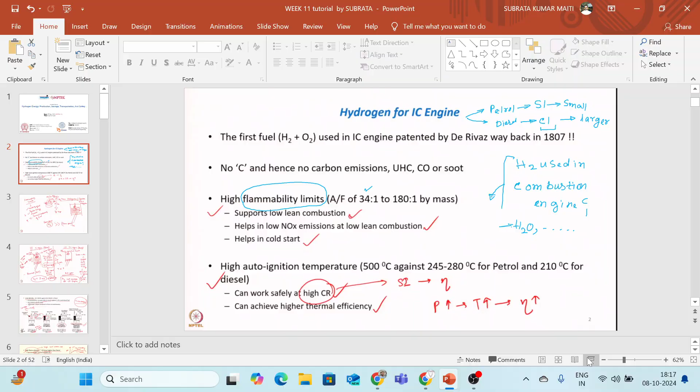And next I am coming to auto ignition. This terminology is very, very important. Auto ignition: why is auto ignition important for IC engines? In each case, auto ignition temperature is important for the petrol engine as well as the diesel engine. If the auto ignition temperature is low, it is better for the compression ignition engine, I mean the diesel engine. And if the auto ignition temperature is high, then it is a better fuel for the petrol engine or SI engine.

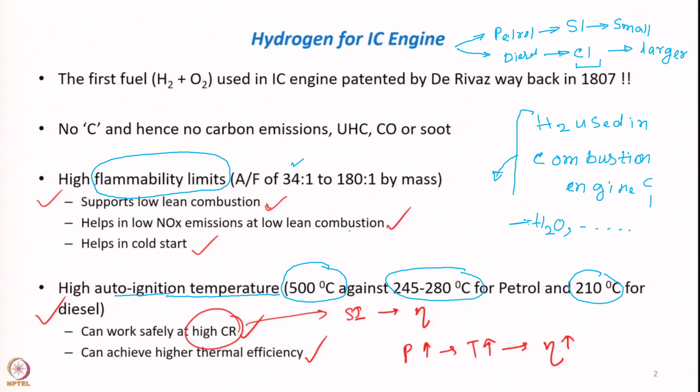So you can remember the auto ignition temperature of hydrogen is 500 degrees centigrade. It is very, very high. Whereas petrol has an auto ignition temperature of 245 to 280 degrees centigrade, and 200 or 210 degrees centigrade for diesel. Why is this auto ignition temperature important? You just need to understand why this auto ignition temperature matters.

Auto ignition temperature. Ignition temperature. As the name suggests, the fuel will automatically ignite. How does it automatically ignite?

Suppose you have one fuel, suppose you have petrol. How will the ignition happen automatically? If we increase the temperature of the petrol, then at a certain temperature, for the case of petrol, 280 degrees centigrade, when the temperature reaches 280 degrees centigrade, the petrol will automatically ignite. You do not need any supply of external fire. This petrol will automatically ignite. At which temperature the petrol automatically ignites, this is called auto ignition temperature.

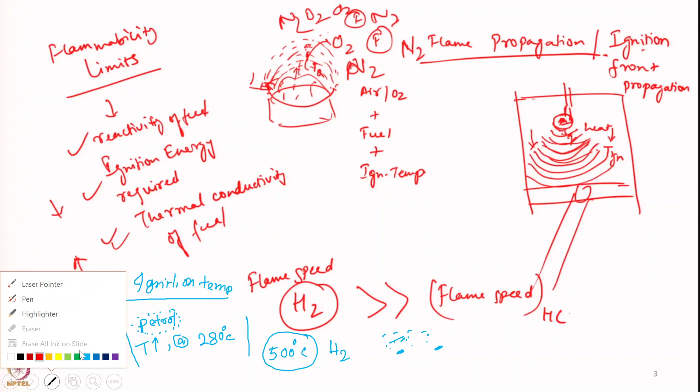Why does hydrogen have a higher autoignition temperature? The density of hydrogen is very, very less. So the gap between two hydrogen molecules is very, very high. When temperature is given, how is it automatically ignited? When the temperature is provided to the hydrogen, the randomness of the hydrogen gas molecules will be high, and the collisions between the two molecules will be less because the distance between the two molecules is very, very high.

What is the inner meaning of autoignition? When two molecules collide with each other in random motion, due to the collisions, friction force will be generated. Due to the friction, high kinetic energy will be generated, and due to the high kinetic energy, energy will be released, and at some level it will automatically ignite. As hydrogen gas molecules have a very large distance, the collisions and friction will be less.

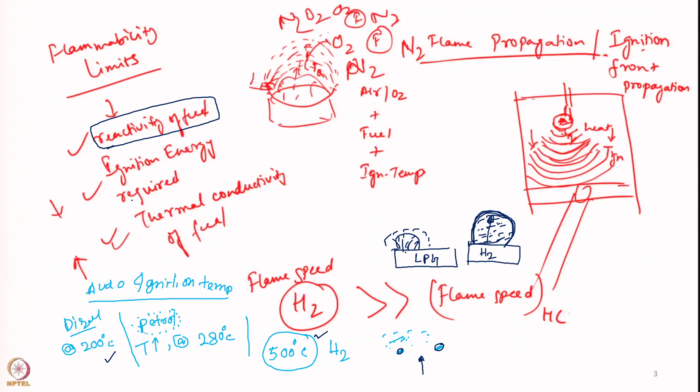Ignition energy is also required, and the thermal conductivity is very high for hydrogen fuel. When the thermal conductivity of hydrogen is very high, at a longer distance, the hydrogen gas molecules will have higher temperature because the conductivity of hydrogen is very high. So the temperature is very high at a certain or larger distance.

So the flammability will be very high for hydrogen.

One more important thing, this terminology is very important, that's why I am discussing it deeply: flame front propagation. That means, suppose this flame front is propagating like a wave. The flame is propagating like a wave. This is called flame front propagation.

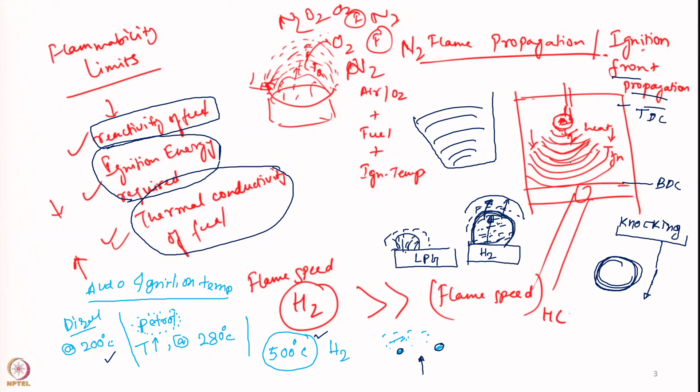These are all the things I discussed, along with the basic principle of the SI engine and CI engine. Again, I am just explaining to you. This is the SI engine, the spark ignition engine, or you can say petrol engine, and this is called the diesel engine, the compression ignition engine. The working principle of the SI engine and CI engine is different.

Coming to the SI engine, what happens in the combustion chamber or cylinder? This is the piston cylinder. This is the cylinder and this is the piston. The piston is moving to top dead center, TDC, and moving downward direction to bottom dead center, BDC. When the piston goes down up to the bottom dead center, the air-fuel mixture, meaning air and petrol mixture, comes into the combustion chamber.

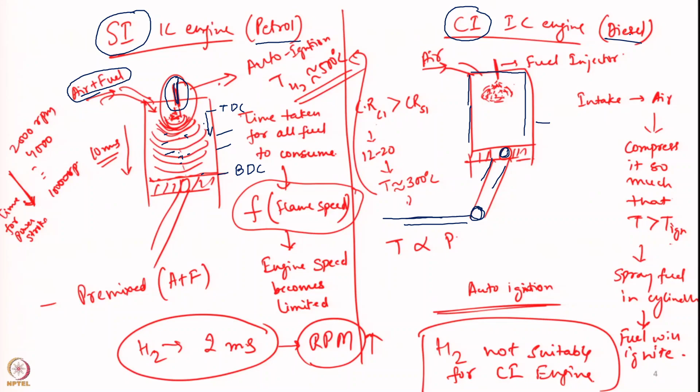For the case of the compression ignition engine, at first air is drawn into the combustion chamber, and the piston compresses this air, meaning the piston goes to top dead center and compresses the air. During compression, if the pressure is high, the temperature goes high.

This temperature will reach up to 300 degrees centigrade. When this temperature is reached, there is one nozzle or fuel injector. This is called the nozzle or fuel injector. What is the function of the fuel injector?

The function of the fuel injector is to atomize the fuel. Atomize the fuel means it will produce the fuel into very small particles, such that the combustion will be uniform combustion.

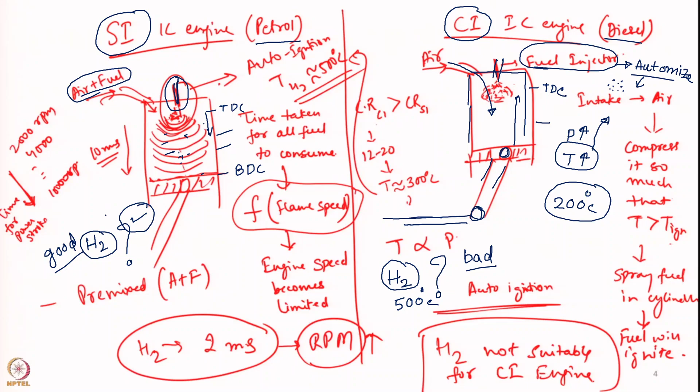This is all about turbocharging - hydrogen can be mixed in turbocharging, so a higher amount of calorific value will be generated. Turbocharging means at higher pressure the hydrogen fuel is injected into the combustion chamber. Most racing cars use turbocharging because racing cars require...

very high speed at a very limited time, meaning the acceleration will be very high in a very short time period. That's why they use the turbocharging method - the fuel is injected at high pressure. This is called turbocharging: fuel used at high pressure, or the air-fuel mixture used at high pressure, in the racing car.

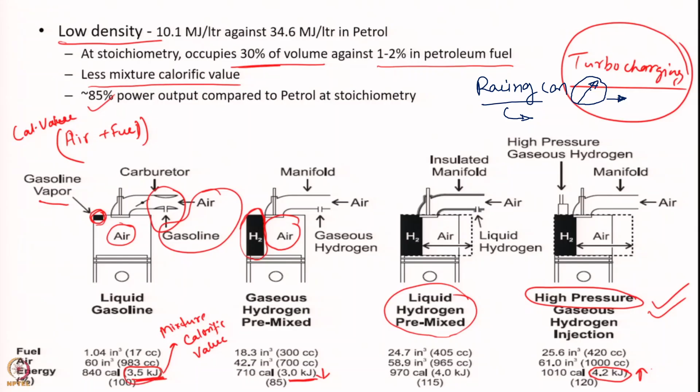Knocking - I've already discussed hydrogen. In the case of hydrogen, knocking is very, very high, but petrol knocking is very, very less. How can we resolve this problem? We can resolve this knocking by using lean fuel, or a high amount of air with a limited amount of hydrogen. If we use lean fuel, then this knocking problem can be avoided.

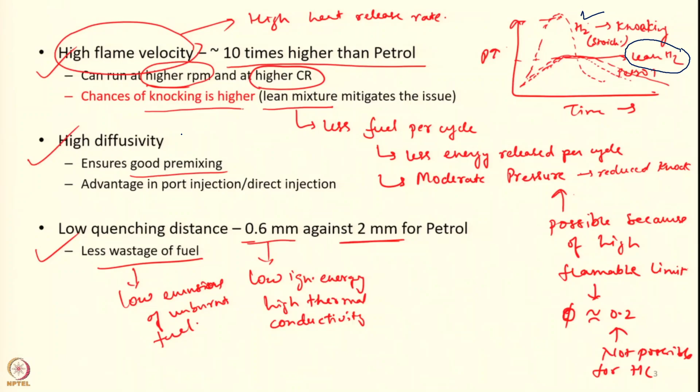One thing is important: if we use hydrogen in the combustion chamber, as we know hydrogen has a very high thermal conductivity value. So what is the requirement? The requirement is that inside the combustion chamber, the temperature or reactions should be uniform - combustion should be uniform combustion. This is the requirement: uniform combustion.

One student is waiting.

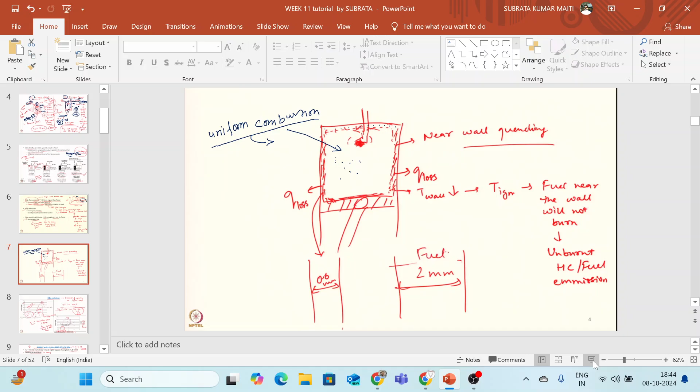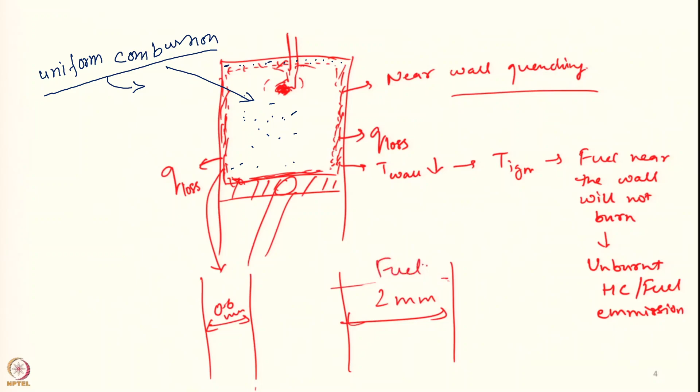Inside the combustion chamber, it should be uniform. For getting uniform combustion, the temperature should be uniform inside the combustion chamber. The temperature obviously will be high around the nozzle, or for the case of the SI engine, spark ignition engine, the spark plug temperature will be high, but the desired specification is that the temperature will be uniform throughout the combustion chamber.

For the case of hydrogen, as hydrogen has a very high thermal conductivity, or high K value, the temperature all over the combustion chamber will be almost the same. The change in temperature is very, very small throughout the combustion chamber. But for petrol or diesel, the temperature is very high in that zone. Suppose in that zone it is 1500 degrees centigrade, but near the wall the temperature is much less, suppose 1000 degrees centigrade.

So in that case, combustion will not be proper or uniform. If we use hydrogen, this temperature difference gap, or boundary layer, will reduce. For hydrogen, this boundary layer will reduce up to 0.6 mm. For other fuels like petrol and diesel, this boundary layer is very high. So with hydrogen there will be uniform combustion throughout the chamber, but with other fuels you cannot get uniform combustion. This is one advantage of using hydrogen for combustion. Okay.

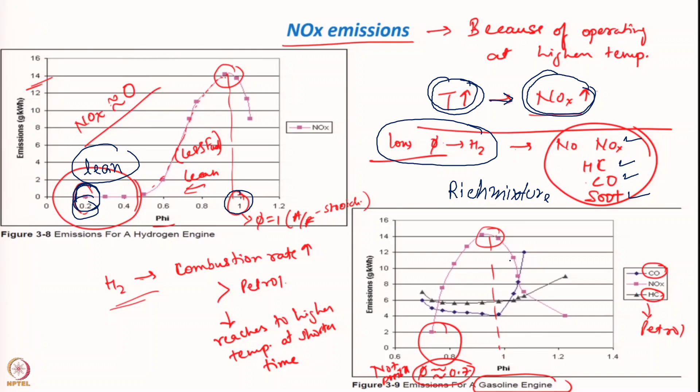Okay, so for hydrogen, a limited amount of hydrogen can be used and it can be combustible in the combustion chamber, and the temperature will also be low, because less hydrogen is burning. As the temperature is lower, NOx production will be less for hydrogen, but for petrol or diesel, NOx emissions will be high. And this is one example, with some values you can go through.

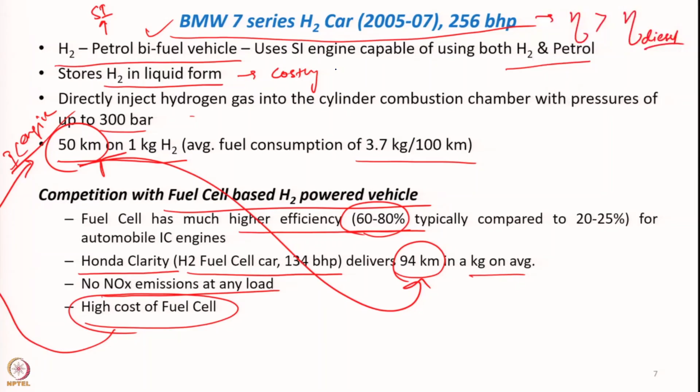Next, I am coming to the fuel cell. What is a fuel cell? The question is always that hydrogen is not used directly in the combustion chamber, because the efficiency of the hydrogen combustion engine is low.

Your screen is not visible. Your screen is not showing. Acha. Okay, no, we can see the screen. Whoever has the problem, you can sign out and rejoin. Yes, I get it. Thank you. Okay, when the screen is not visible, just ask me.

Okay, for the case of the fuel cell: as hydrogen cannot be directly used in the combustion chamber, what is the alternate way to use hydrogen as a fuel? The alternate way for getting higher efficiency is the fuel cell. What does the fuel cell do? The input to the fuel cell is hydrogen and oxygen, and it produces electricity, with water as a byproduct.

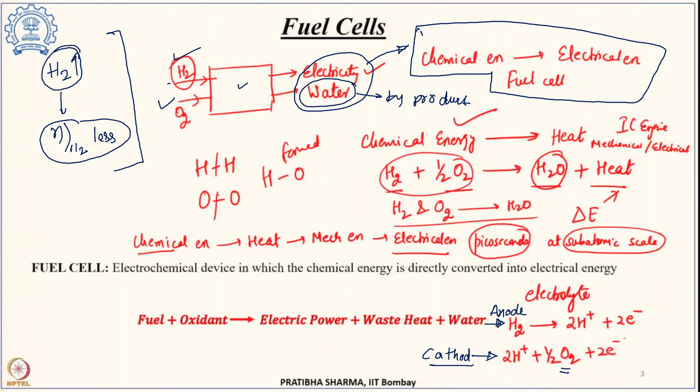The oxygen and H plus ions react: 2H plus plus half O2 is producing H2O. This reaction is the cathode reaction.

So H plus migrates from anode to cathode, and the 2 electrons are available here. These 2 electrons will flow from anode to cathode through the external circuit. And if I add one electric bulb, it will glow, which means electrical energy is generated.

So electrical energy is generated from the fuel cell if we supply hydrogen at the anode side and oxygen at the cathode side. It looks very simple, but it is not at all simple. It is a complex system; there is a porous transport layer.

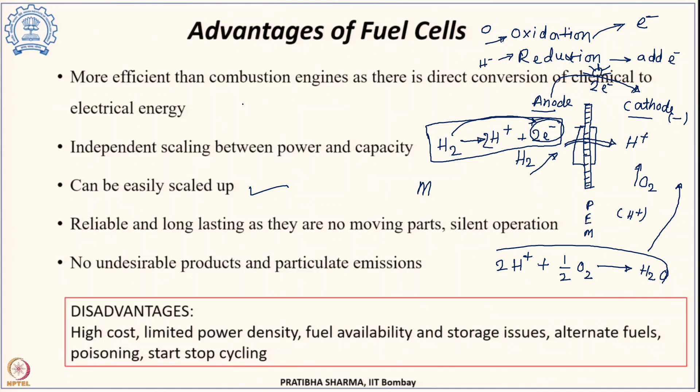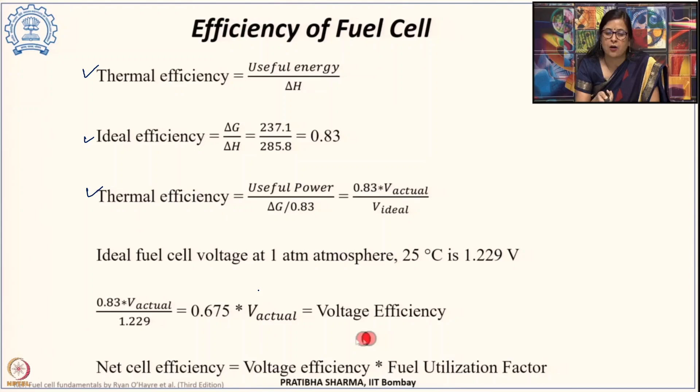Principal operations of a fuel cell I have already discussed. And these are the equations for calculating the fuel cell efficiency. For the fuel cell general efficiency, you can use the ideal thermal efficiency. Okay, this formula can be used.

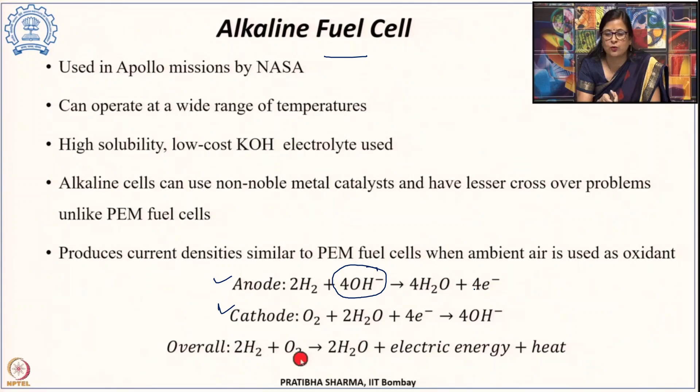The reactions I already discussed for the PEM fuel cell. For the alkaline fuel cell, the reactions will be like this. Compared to the case of H plus, this OH minus ion will transfer from cathode to anode. Okay, here it is just opposite. And for the case of the phosphoric acid, H plus ion will also be transferred. Okay, for the molten carbonate, the ion will be CO3 2 minus.

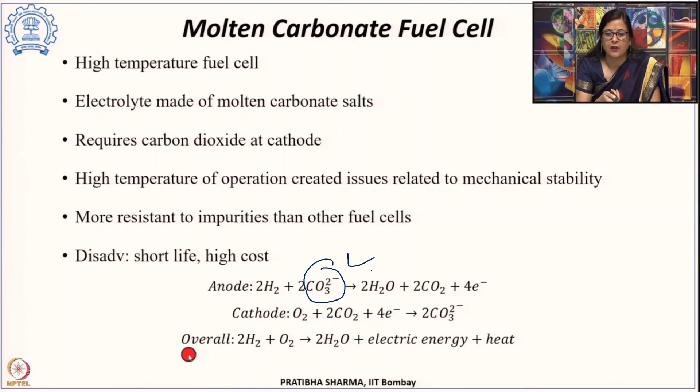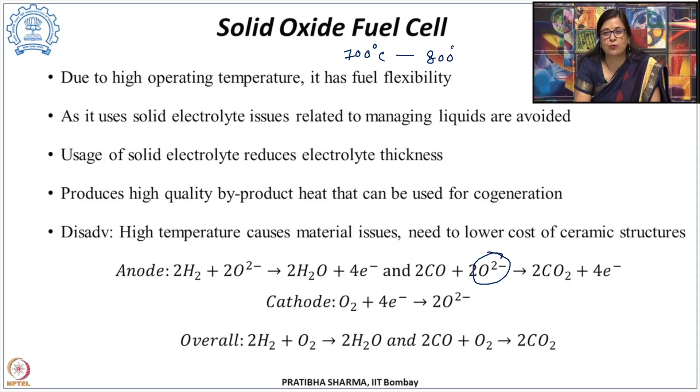Solid oxide: O2 minus. The solid oxide is generally used at a high temperature. It is called a high temperature fuel cell. High temperature means like 700 degrees centigrade, 800 degrees centigrade. The differences you can study.

Components: there are different components used. A polymer electrolyte membrane is required. A catalyst layer is required, like platinum catalyst, noble catalyst, iridium catalyst. Gas diffusion layer, generally carbon paper or carbon cloth. The bipolar plates and gaskets. Gaskets are used to prevent gas leakage from the system and for getting uniform gas pressure throughout the electrode surface.

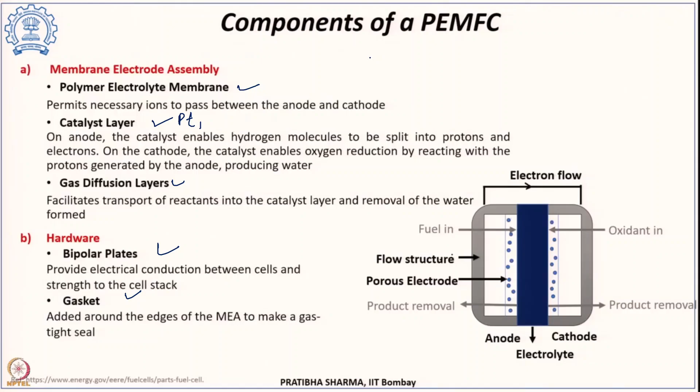There are some irreversibilities in the fuel cell, I mean there are some losses in the fuel cell: activation over potential losses, ohmic over potential losses, and concentration over potential losses. Activation over potential losses are in terms of the kinetics. Okay, kinetics of the reactions.

Ohmic over potential is the ohmic resistance, and concentration over potential is due to the mass transfer limitations at higher current density. Mass transfer limitation means that if a higher number of ions gather there, they can accumulate, and there will be a problem transferring ions from one place to another, and this is the concentration over potential loss.

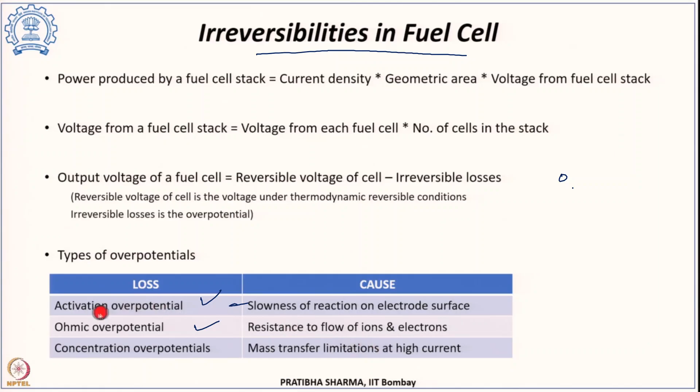And for the polarization curve, activation losses are dominant at the lower current density, ohmic losses at the moderate current density, and mass transfer losses occur at the higher current density. At the higher current density, what happens? The reactions will be very fast, so a high number of ion molecules will gather together, and due to this gathering of ions it may create some problems.

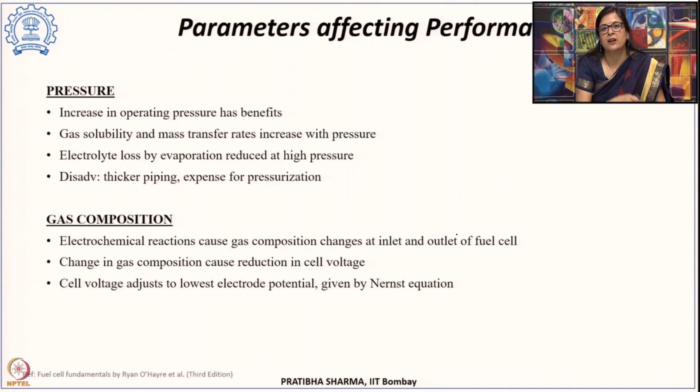Next is the sensor part.

Why is hydrogen sensing important? Because hydrogen is a highly flammable, highly combustible gas. So there should not be any trace of hydrogen in our work environment, whether hydrogen is leaking from the chamber or from the hydrogen tank. If hydrogen is leaking from the hydrogen tank, it may catch fire.

So sensing hydrogen, just to detect a hydrogen leak, is a critical sensor requirement. Hydrogen sensors are useful in the methanol industry, hydrogenation of hydrocarbons, desulfurization of petroleum products, and different metallurgical processes, for example the steel industry, which requires hydrogen for the reduction of iron ore, or coal mines.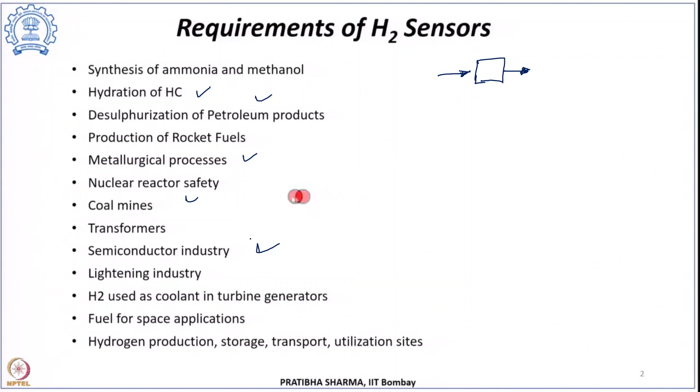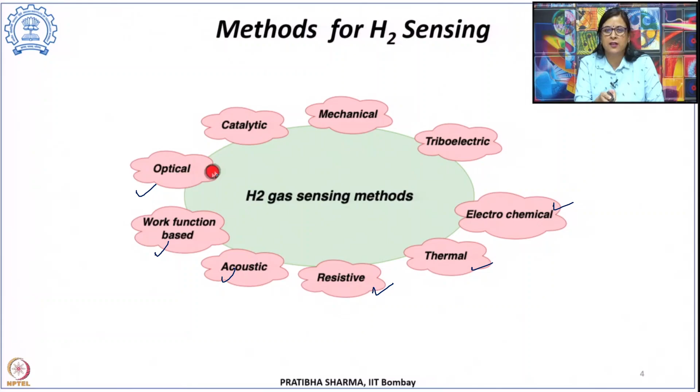The semiconductor industry also requires hydrogen. These are the different industries that use hydrogen. So there should be a hydrogen sensor to detect whether there is hydrogen leakage or hydrogen traces in the atmosphere. If hydrogen traces are there, they may cause harm. There are different sensing methods: catalytic, mechanical, triboelectric, electrochemical, thermal, resistive, acoustic, work function based, and optical. I will discuss one or two, then go to the questions and discussion part.

First of all, I am coming to the thermal sensor. As the name indicates, a thermal sensor senses temperature or heat energy. When the temperature changes, this change of temperature will be sensed by the thermal sensor.

How does the thermal sensor work? When the temperature changes, it senses it by the conductivity principle. There is a formula, Q, the heat transfer rate, equals K A dT by dx. Q is the heat transfer rate, K is the thermal conductivity of a metal or of a gas, here we use the gas, A is the exposed surface area, dT is the change of temperature, and dx is the length.

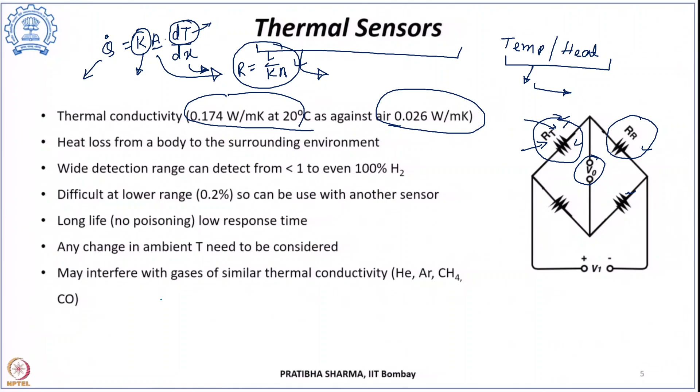Suppose 0 degree centigrade. This is also correct. This is Kelvin; you can also say centigrade. But there is no difference whether you are writing per centigrade or per Kelvin. There is no difference. Just understand that 0 degree centigrade means 273 Kelvin, 273 degree Kelvin.

30 degree centigrade means... Okay, I understood. It is nothing but per degree centigrade or per degree Kelvin. For 1 Kelvin or 1 degree centigrade it is the same. For increasing 1 Kelvin or for increasing 1 degree centigrade, the energy required is the same.

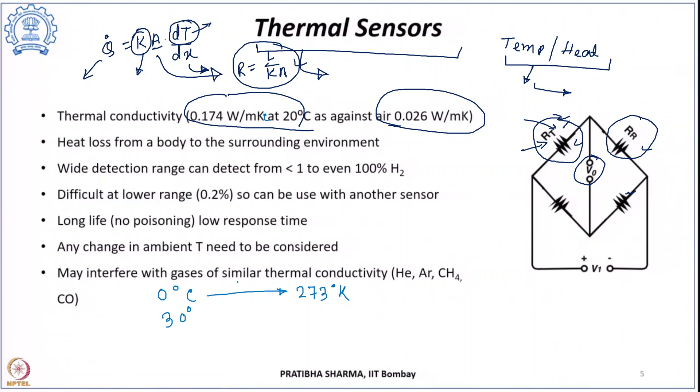Suppose initial value T1 is 20 degree centigrade and T2 is 30 degree centigrade. The difference is always the same, whether it is centigrade or Kelvin, correct? Per degree centigrade or per degree Kelvin is the same. Agree. Yeah.

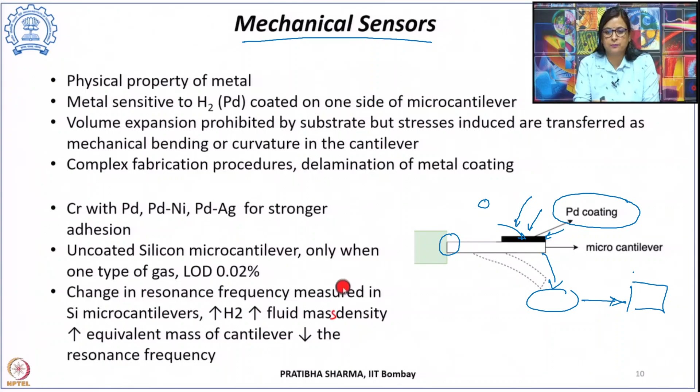Optical sensor basically measures the reflectivity. On the principle of reflectivity, it changes, and at different hydrogen concentrations, the reflectivity will have different values. According to the different reflectivity, we can sense the concentration of hydrogen. I am not going into details because time is limited.

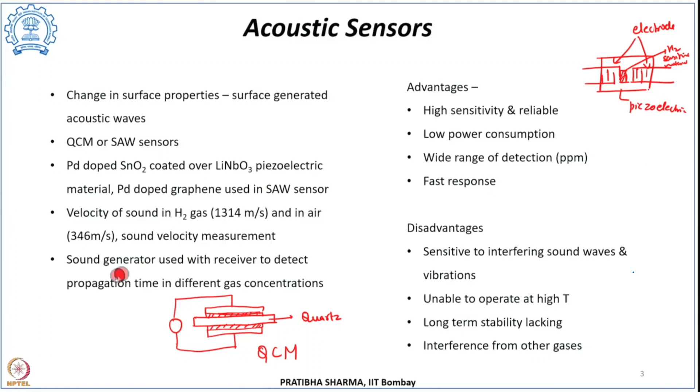I will share one interesting part. Before that, I have to start the question discussion part. The first question is: the amperometric sensor uses which technique to sense hydrogen?

For the case of the amperometric sensor, what value will be measured? The current value will be measured. How will the current value be high? When the voltage will be high, when the concentrations of the hydrogen will be high, the voltage value will be high. How do the concentrations of hydrogen increase? Because the redox reactions will be high, because electron production will be high, so current will be high, voltage will be high. This is the amperometric sensor working principle. So what is the answer here?

It is C. Diffusion limited current measured at constant applied voltage. This is the question number, answer is C, diffusion limited current measured at constant applied voltage.

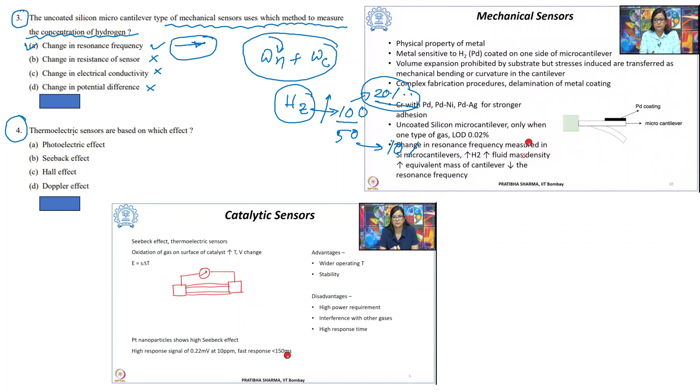Next question, question number 4. Thermoelectric sensors are based on which effect? This is a very simple thing.

Photoelectric effect, Seebeck effect, Hall effect, and Doppler effect. Thermoelectric sensor.

Seebeck effect. What is the Seebeck effect? Yes, Seebeck effect is like this: if in a metal you create a temperature difference on both sides, then there will be a potential difference also.

Exactly. If the temperature difference is there at the two junctions, and if we connect the two junctions through a conducting device, what will happen? If we maintain T1 degree centigrade at one junction and T2 degree centigrade at another, suppose T1 is 100 degree centigrade and T2 is 0 or 10 degree centigrade, if I maintain one ice bath here and one fire there, there will be a potential difference. This potential difference can be measured using the Seebeck effect equation.

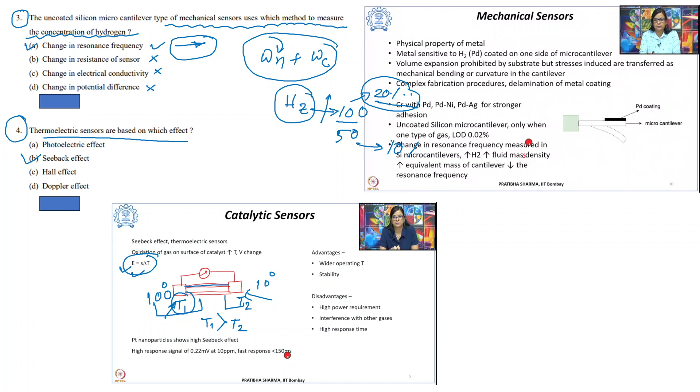Question number 5: which method is effective for multi-point sensing of hydrogen using a single device? Using a single device, what is the answer?

I think optical time domain reflectometer. Refractometer means there is the refractive index. What is the refractive index? Refractive index is the speed of light in vacuum divided by the speed of light in any object or through any object. If this type of meter is engaged, we can get the concentration of the hydrogen, or we can measure the device.

Next question: the nature of the electromagnetic field decay in evanescent field measurement exhibits which behavior? I have written that electromagnetic fields decay exponentially with distance from the surface where they are formed in an evanescent field. This is because evanescent fields are non-propagating electromagnetic waves. They are spatially concentrated near the sources.

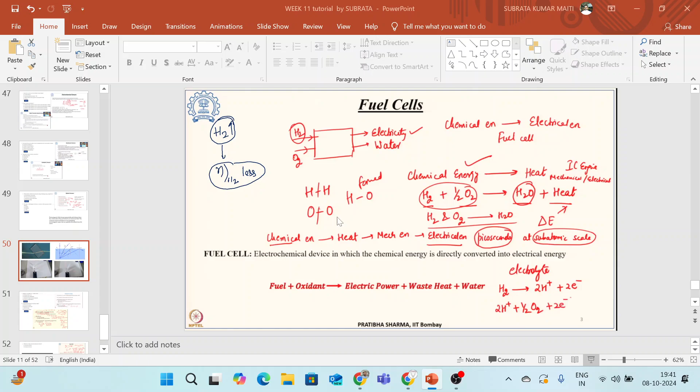What happened? Just let me explain. So our answer is exponential, answer D. So what does that mean? This is an interesting thing. How many students are there? This is actually an interesting thing.

Generally, what happens? Suppose you have one glass plate. Are you listening? Suppose this is one glass plate. I am sending one light. Basically it is a prism - no, at first I am talking about one glass plate, a simple glass plate, like your windows made of glass.

If I radiate or let one light fall on the glass plate, the light will bend. The light will bend, right? Is it okay, do you agree with that? Yes, it will deflect. Why is it deflecting, or why is the light bending?

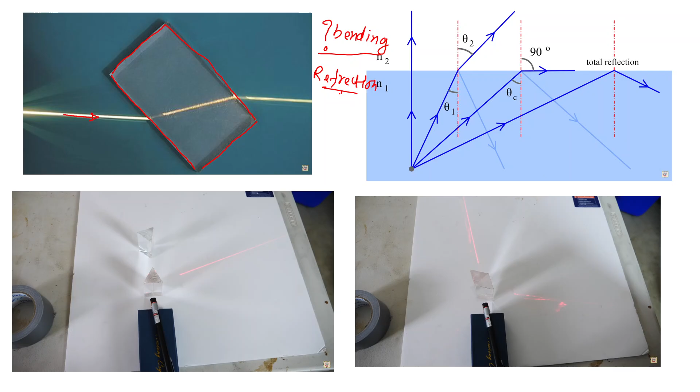What does the refraction property of light say? It means that if light travels through different media, or different densities of medium, the light passes through media at different concentrations and the light will be bent. This is called refraction - the bending of light is called refraction.

Here, what happened? This is the air medium, and this is the glass medium. The concentration or density of air is less compared to the glass, so the light will be bent.

This is refraction. And what is reflection? When the same light is falling - suppose this is one plane, suppose the first light is incident at a theta 1 angle, and this is coming out at a theta 2 angle. Again I am increasing the angle - this theta 1 I am increasing, suppose like this way, I have increased this angle to theta c.

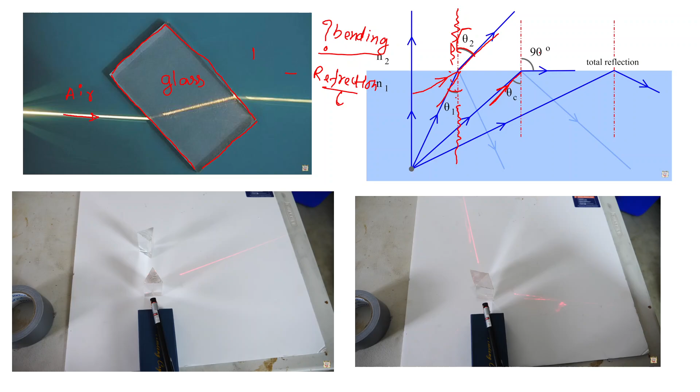The light will not come out. The light passes through the adjacent layer; suppose this is the glass medium and this is the air medium, through the interface of the glass and the air. If I increase the angle beyond theta c, what will happen? I am increasing this angle more. This theta 1 angle is higher than the theta c angle.

The light is not coming out through the medium, but instead of coming out, the light is reflecting inside the same medium. Suppose this is glass, the light is falling here, and it is not refracting. In place of refracting, the light is coming back into the glass material because the incident angle is much higher than the critical angle.

This is called internal reflection. Okay, this is called internal reflection. Internal reflection is very important. The optical fiber works on the principle of internal reflection. The light wave propagates by internal reflections, and the signal will transfer from one end to another end.

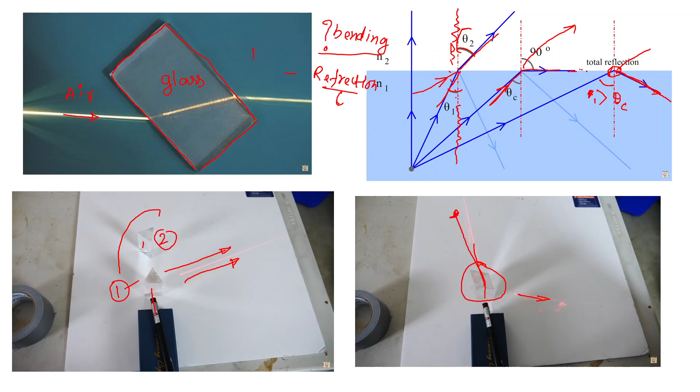Due to the presence of the non-propagating electromagnetic waves, the light will go straight. When there are no non-propagating waves, the light will bend in this way. You can study these things through the internet or YouTube. It is an interesting experiment, or you can do it yourself also.

Next question. Question number 7: is hydrogen suitable for CI engines? Hydrogen is not suitable for a CI engine, compression ignition engine or diesel engine. What is the reason? Hydrogen has a high auto ignition temperature.

If hydrogen is used in a CI engine, what will happen? It will not burn. No energy will be generated, and the engine will not run basically. Exactly. The fuel will not burn, and it will not run, because it is not reaching that limit of temperature, 500 degrees centigrade. When it reaches 500 degrees centigrade, then it is okay. So what will happen? Unburned fuel will come out.

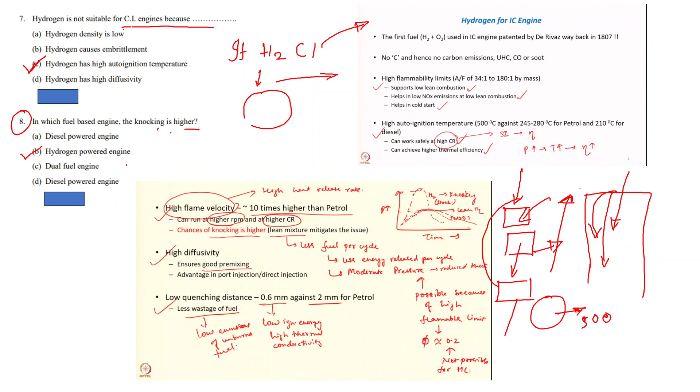The next question, question number 9. Which form of energy conversion takes place in the fuel cell? This is very simple. This is chemical energy to electrical energy. Answer number B.

And the ideal efficiency of the fuel cell is given by which of the following expressions? D. This is D. Gibbs free energy divided by the heat energy, I mean the enthalpy. Gibbs free energy, do you remember what Gibbs free energy is? In what type of energy do we consider the Gibbs free energy? And this is heat energy, you already told. Electrical energy is Gibbs free energy. Exactly. Gibbs free energy is considered as electrical energy.

So for the fuel cell, our output is the electrical energy. The chemical energy is converting into electrical energy. Chemical energy means heat energy. So electrical energy divided by the chemical energy or heat energy. So our definition is delta G, Gibbs free energy, divided by delta H, heat energy. Means output by input. Exactly. Efficiency means the output energy divided by input energy.

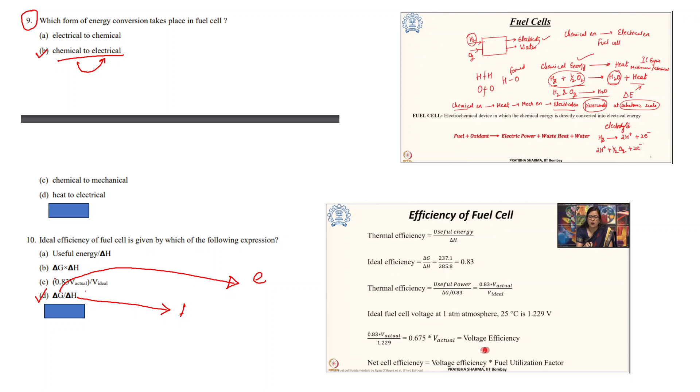Yes. Okay. This is all about the live tutorial classes of week 11.